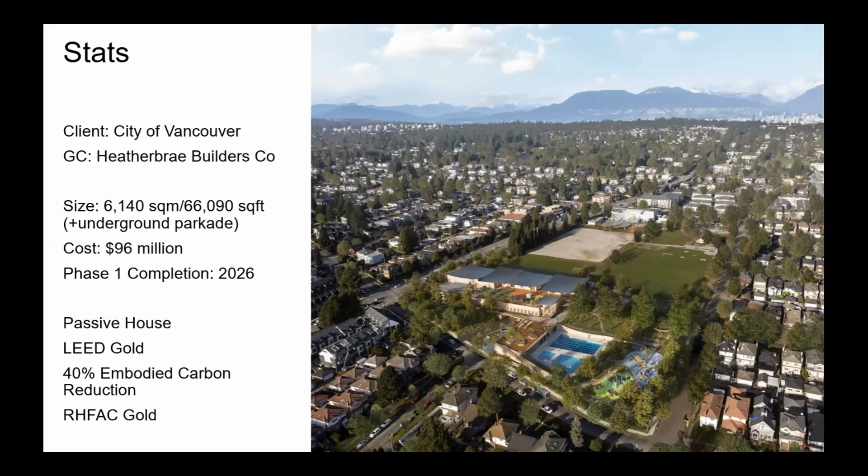A lot of ambitious targets for this project: Passive House certification, LEED Gold certification, a 40% embodied carbon reduction, as well as the Rick Hansen Foundation's accessibility certification goal. So in order to bring all of these targets together, we came up with a project vision. Go to the next slide.

So our vision for this project is to make the Marpole Community Centre the most inclusive, forward-thinking, and high-performing facility the City of Vancouver has ever had. This is the first community center for the City of Vancouver since the Trout Lake Community Center in 2012. There are a lot of eyes on this project. A lot of departments were involved, a lot of ambitions to really cement the City of Vancouver as a leader in this space. Next slide.

So working back from that vision, I'm just going to break it down into our values and principles and goals that all feed into that vision. So next slide. So we have our vision in the center, and that is fed by our values, which are universal, as well as our principles and goals, which are project specific. So starting from that vision, we go to the next slide. Again, that very, very ambitious vision. We then break it down into our values.

So next slide. So in order to do that, we had a series of workshops with representatives from the City of Vancouver, from our consultant group, from the Vancouver Park Board, across all sorts of departments to understand what was important to everyone involved in the project so that we could embed that into the project charter. So if you go to the next slide, together we came up with 13 values for this project, loosely organized in 3 themes. So you'll also notice that some of these values work with more than one theme.

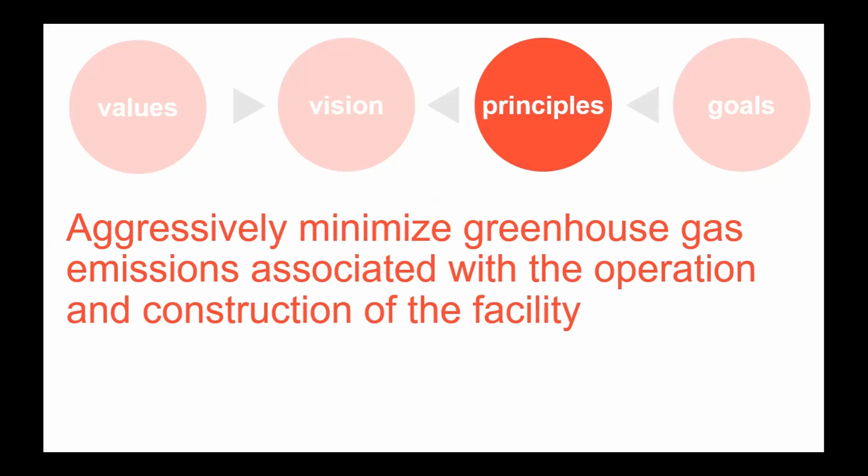So next slide. Our principle for this value is to aggressively minimize greenhouse gas emissions associated with the operation and construction of the facility. So now that we know what we want to do, we have to break it down into goals to figure out how to get there. Go to the next slide. These are our 4 goals associated with this value.

So number 1 is to eliminate the use of fossil fuels. We did this by designing an all-electric building, so there is no natural gas connection to this community center. That includes the pool as well, and even the backup power supply. So number 2 is to generate renewable energy on site. There are photovoltaics on the roof of the building, which feed into a backup battery, which provides our emergency power supply. So there's no diesel, there's no fossil fuels on this building so that we can help meet our operational carbon goals.

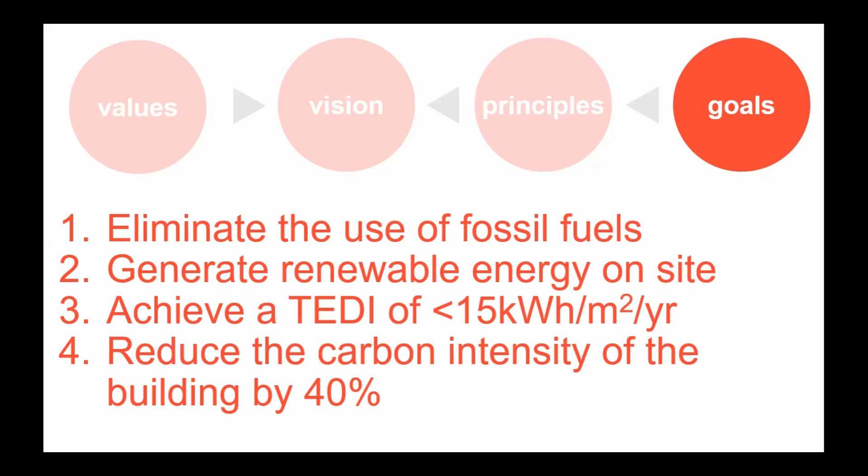The third target is the Passive House target. So achieving a TEDI of less than 15 kilowatt hours per square meter per year, and this is addressing operational carbon. And number 4 is to reduce the embodied carbon intensity of the building by 40%, which is something that Forrest is going to go into more details on. Next slide.

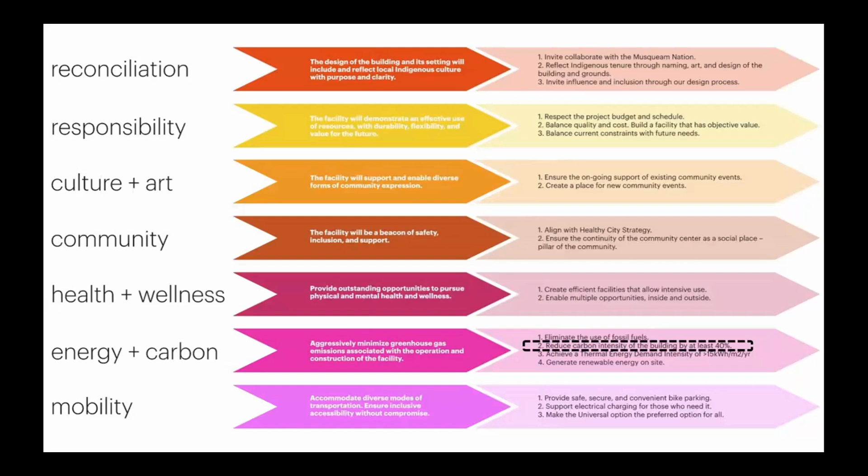I wanted to talk to you about all of our goals because it was important for me to explain that this target of a 40% embodied carbon reduction exists in an ecosystem of many, many goals and many targets. So if you click next, you'll see it circled in black. And the importance of that is when we're making decisions on embodied carbon, we have to make sure we're not undermining the rest of our goals and the rest of our targets in this project.

So if you go to the next slide, again, just a continuation of all of the values and principles and goals for this project. So next slide. Sometimes all of these goals work together, and that's great. That's ideal. An example would be our parking reductions. So we explored parking reductions on this project because of our responsibility value. So one of the goals is to respect the project budget and schedule.

We were given the mandate that no park space should be given over to surface parking on this project. That meant that all parking had to be provided in an underground parkade. The bylaw requirements for parking for a building of this size would have amounted to about 250 parking stalls, which when all laid out was about 7,000 square meters of parking, which is more area for parking than for community programming. And because it's an underground parkade, it's very cost prohibitive.

And so in order to meet that goal of respecting the project budget and schedule, we looked to aggressively reducing our parking counts. We did this by working with a transportation consultant to help us implement transportation demand management measures to reduce the parking count. And those TDM strategies also worked or had overlap with our other goals.

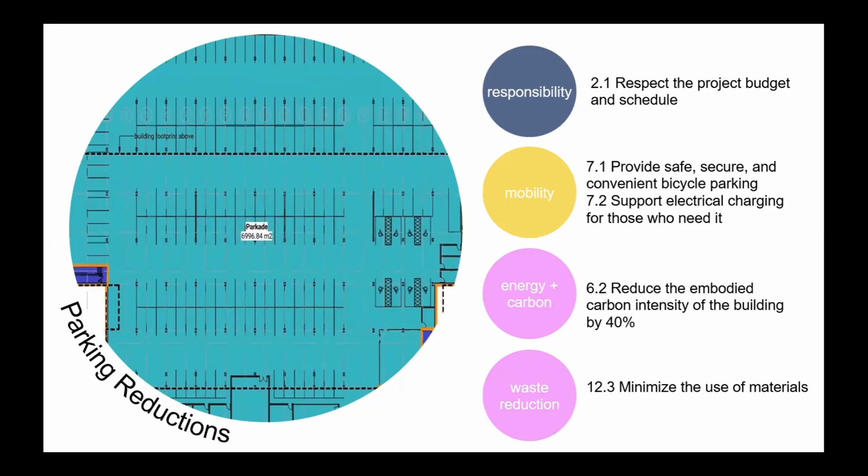Another example of these goals working together is the decision to use a mass timber construction for the structural system. So this met our goal under biophilia to prioritize the use of natural materials, as well as reducing the embodied carbon in the building by using timber instead of concrete and steel. However, sometimes there is some contradiction in the goals.

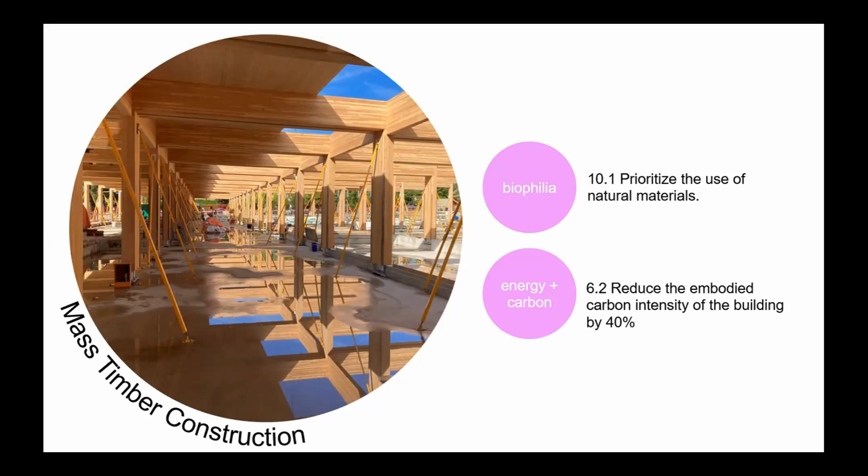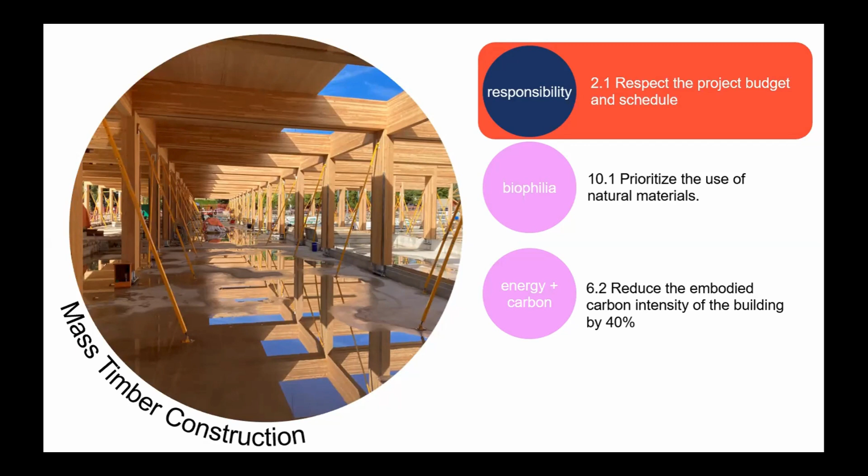So if you click next, there is a premium for mass timber construction, and because of supply chain pressures in our industry right now, there are potential impacts to schedule. So we needed to find ways to use a mass timber system while still respecting the project budget and schedule. And how we did this is to work with a construction manager who allowed us to tender the structural system early so that we could work with a mass timber supplier in BC, and when we needed to revise our design so that it could meet the project budget and schedule. Next slide.

So continuing with that theme of goals that are seemingly at odds is the discussion between balancing operational and embodied carbon goals. Next slide. So this is the discussion between passive house and embodied carbon. So one of our goals, or one of our targets, is to achieve passive house certification. So that TEDI of less than 15 kilowatt hours per square meter per year.

And in order to reduce operational carbon, one of the best ways to do that is to improve your building envelope so that less energy is needed to heat and cool the space. But the trade-off on that is that by increasing your building envelope, you're increasing the amount of materials needed for the building and therefore increasing your embodied carbon.

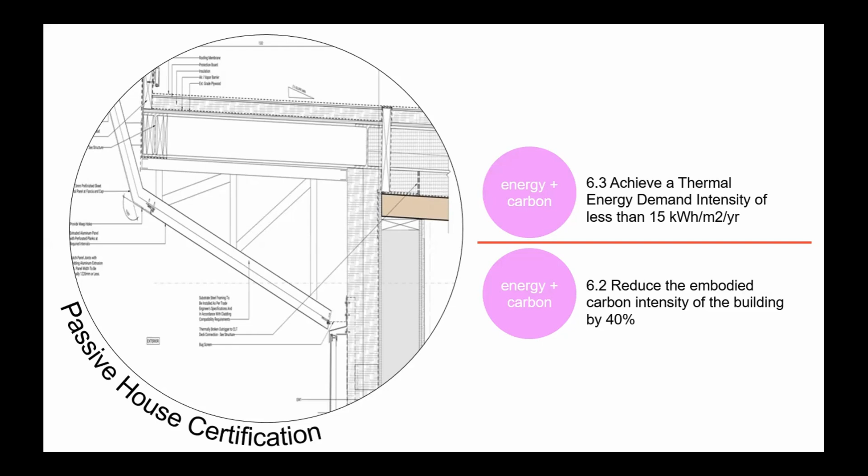So next slide. Before I go too far, I just wanted to give a little passive house primer in terms of the actual targets for passive house. So passive house basics is that a passive house building has to meet two targets: a TEDI of less than 15 kilowatt hours per square meter per year, and an airtightness testing of 0.6 air changes per hour. So it's a low energy building that's very airtight.

And if you go to the next slide, Passive House Institute has released Passive House principles that will help designers achieve that. And for some of these, there are carbon implications, including thermal insulation. So the wall assembly of the Marpole Community Centre is about 8 inches of insulation. So that's a lot of material and a lot of embodied carbon.

Another one is passive house windows. So we have triple glazed windows. So again, a lot of material, a lot more embodied carbon. Also air tightness, so different membranes, and thermal bridge reduced design, so specialized components to create thermal breaks.

So all of these impact your embodied carbon in the building, and need to be taken into consideration so that you're not prioritizing operational over embodied carbon reductions. But another way to improve your passive house modeling, and probably the #1 piece of advice the passive house designer or consultant will give you, is to improve your form factor.

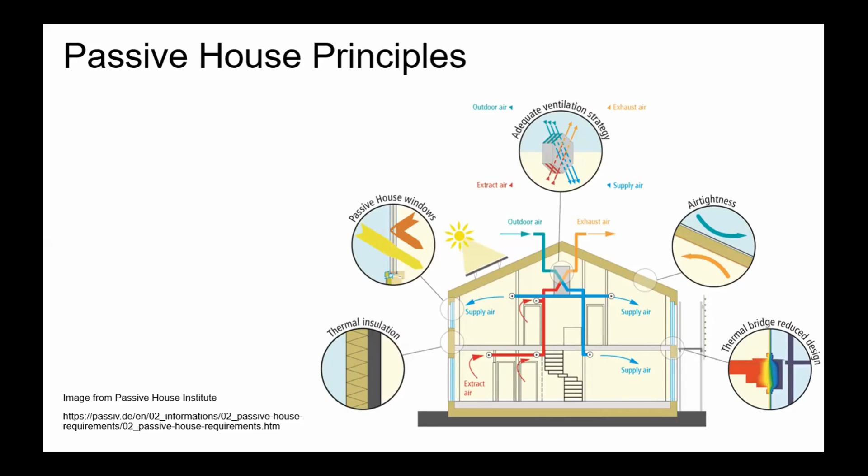And what that means is to reduce the amount of building enclosure needed to enclose the building or the volume. How that helps you from a passive house perspective is there's less surface area for thermal heat gains and losses. And how that helps you from an embodied carbon perspective is that if there's less area of building enclosure, there's less embodied carbon. So knowing that, we use that strategy to influence our building planning. Next slide. I'm going to walk you through the building planning, just to illustrate this.

So the first thing we did was to decouple the pool function from the community center. Because the community center is the passive house building, and the pool is a seasonal program, and the spaces associated with the pool are indoor-outdoor spaces. And that's not great for passive house and for air tightness. So if we just remove it from the passive house enclosure, we're improving our passive modeling.

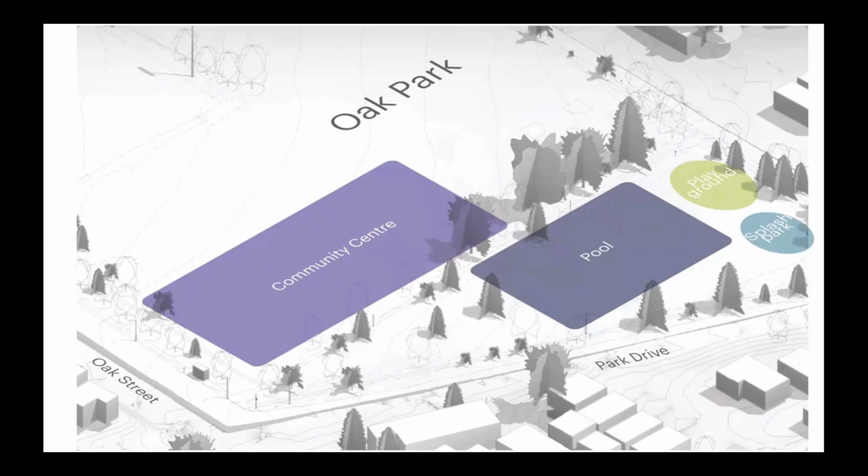Next. So then we can focus on the community center itself. When we're looking at organizing the spaces, we're breaking it up into the different components and what they need in terms of heating and cooling. So we start with the gymnasium. It's a large volume; we're just putting it tight against Oak Street to help buffer the rest of the building and the building programs from that loud arterial road. Next slide.

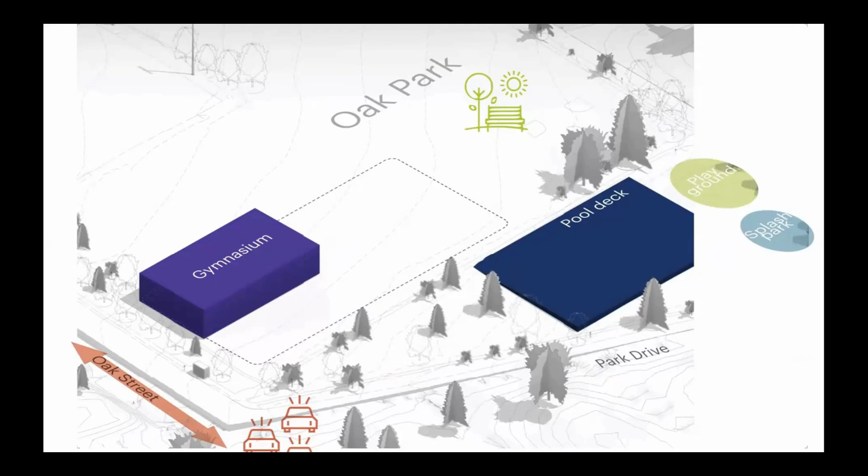Next, we locate the fitness and recreation programs, which are programs where people are generating a lot of heat. They're working out, they're doing cardio, it's getting hot and sweaty in there. And so by locating them on the north aspect of the building, we can benefit from passive cooling. The multipurpose rooms are located along the south bar because these are more passive areas. People are attending lectures, going to luncheons, or it's after school care. So these are spaces that really benefit from those solar heat gains and that southern exposure.

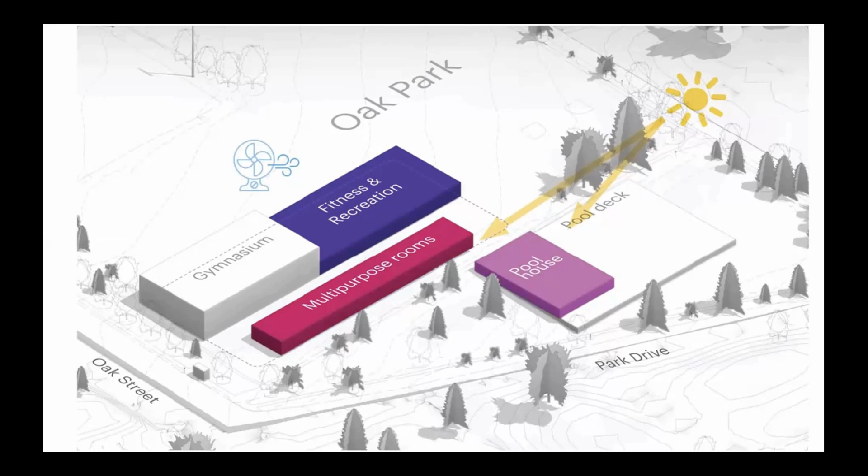Next slide. Next, we introduced a circulation spine, which we've called the Great Hall. It's an east-west axis that connects views to the park on either side. And the other move that we did here is we've removed the vertical circulation from the passive house enclosure. That's that yellow tower in the bottom right-hand corner of the building. And we did that to reduce thermal bridging.

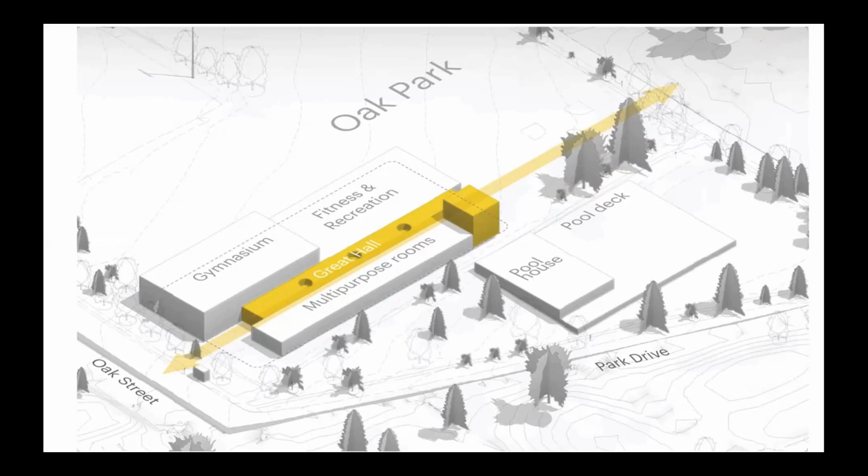So elevators are not airtight, and the elevator is connected to the parkade. So if we can reduce the amount of unconditioned parkade air just opening right into the building, we can improve the passive house modeling as well.

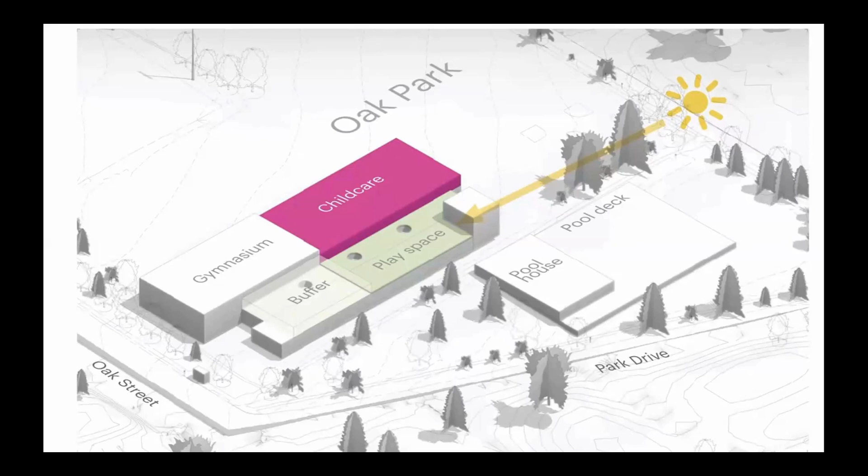So next slide. And the final program component is the childcare, which is located on level 2. Again, nestled behind the gymnasium so that it's protected from Oak Street. And opening up that play space on the south side of the building so that it's benefiting from that southern exposure. It's also protected by the solar panels. So where it says buffer, that's where our solar panel array is. And again, it's just to protect those child spaces from Oak Street and those busier areas. Next slide.

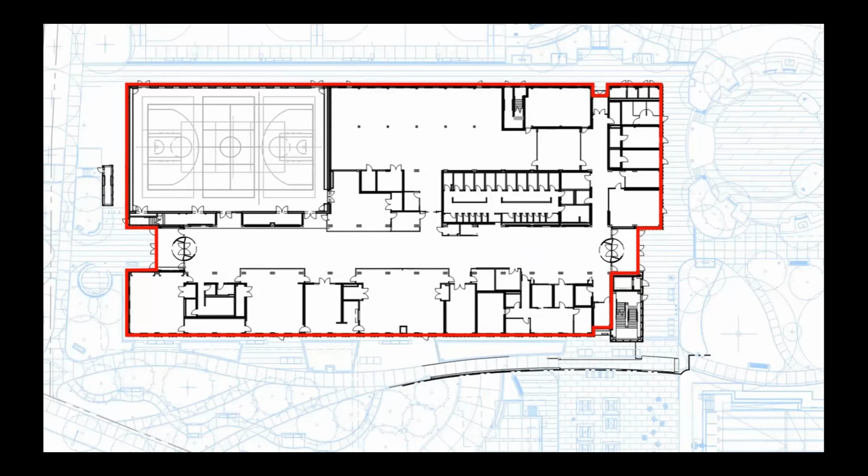And then on level 2, next slide, is the childcare. And again, you can see very simple massing, reducing the articulation as much as possible to create a very effective form factor. Next slide.

And just to end on a pretty picture so that you could see how it all comes together. So by incorporating these Passive House principles and this logic in terms of form factor into the planning of the building, we can meet our sustainability goals when it comes to embodied carbon as well as operational carbon. So it's not a trade-off.

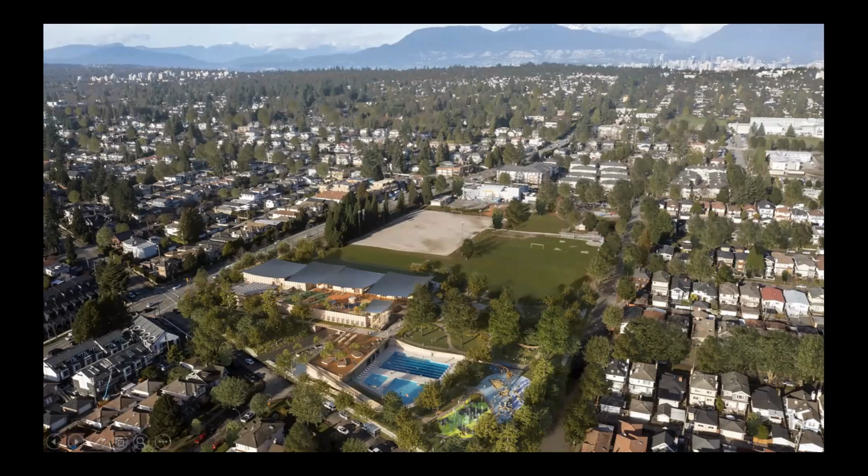And I will pass it over to Forrest now.

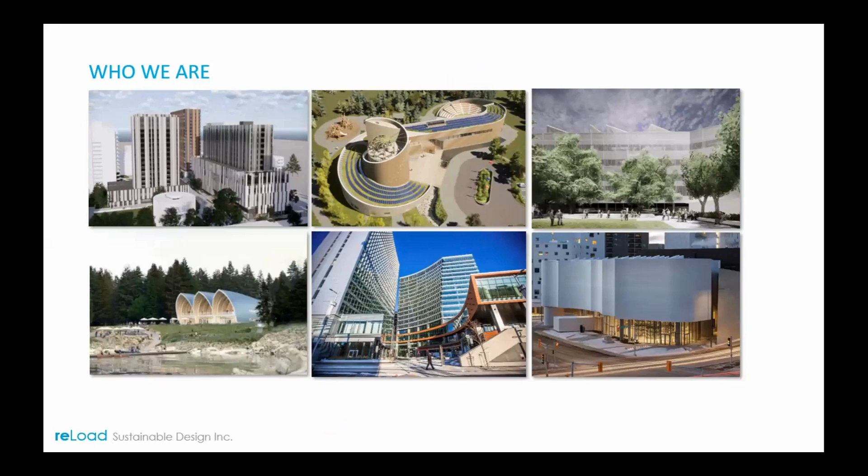To dig into the outline that I'll be sharing with you, we have the project context and goal overview, then the baseline for this project and how it evolved in relationship to the City of Vancouver Embodied Carbon Guidelines. And then I'll talk about the low carbon design strategies. I'll mention that these strategies are also featured on the CLFBC website, so you can take a look there, and I'll try to share some details that are additive to that conversation as well.

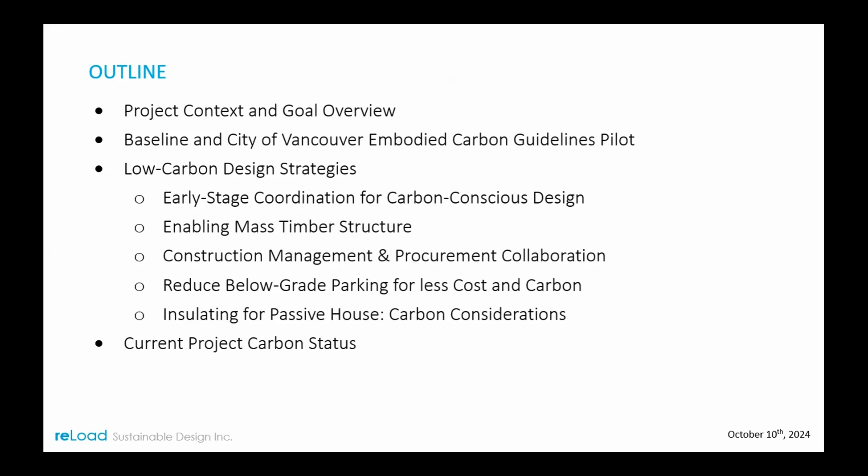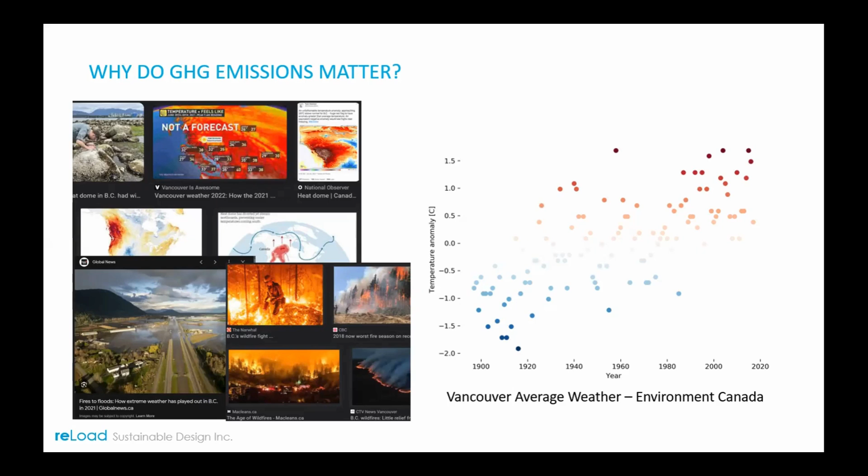But to talk about where this 40% reduction target came from, we have to look at the City of Vancouver Climate Action Plan. So here you can see that they're targeting a 40% reduction compared to 2018. So that's where this project target came from. And that's because we are in a climate crisis right now where we're seeing flooding, increased wildfires, and heat domes with an ever-increasing average temperature in Vancouver. So the city recognized that and identified embodied carbon emissions reductions as one of the key strategies to address this crisis. This project took that 40% reduction goal, and at the very beginning, we set some performance-based targets.

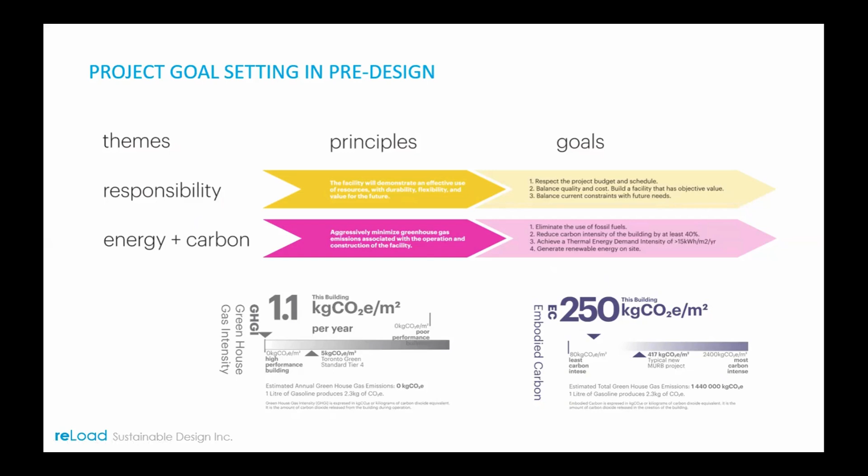So we understand that we have to be 40% less, but 40% below what? And what is that baseline? So we looked at benchmarking first, and we know that there is available benchmarking information for MURBs, but not that many databases that have community centers out there. So we started with this 250. Let's see if we can hit that in the preliminary design stage. Remember that number, I'll come back to that later on. We also had this GHGI goal of 1.1 kilogram CO2 per square meter. That relates to the Passive House project as well.

So talking about the baseline embodied carbon for this project, we had this OPR 40% reduction based on a 2018 baseline. So what is that baseline? We had to have a lot of conversations with the City of Vancouver and Diamond Schmitt to establish a building that would have been constructed in 2018 to generate a notional baseline. And at that time, there was little guidance out there for how to approach this problem. In 2021, the first draft of the then called LCA modeling guidelines was released. And we used that draft in our first whole building LCA to provide feedback to the City of Vancouver on implementation, whether it was forming a good baseline, whether we could game it. We tried to break it and gave feedback on how it could be fixed.

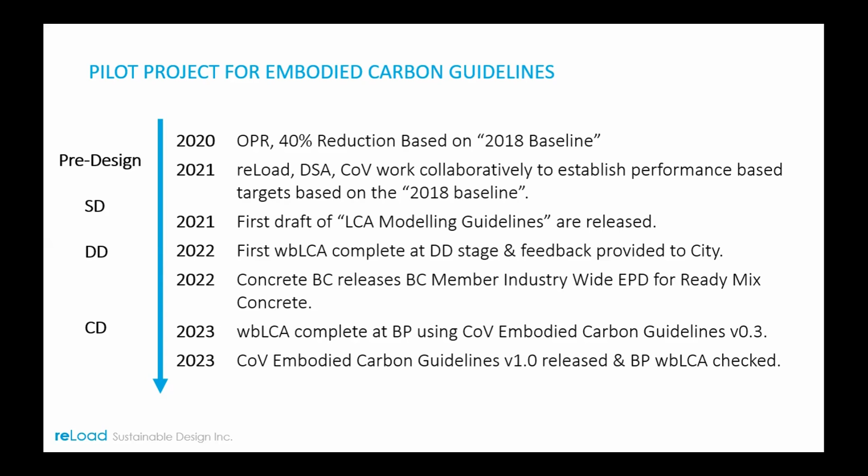And then the baseline changed again when Concrete BC released their member-wide EPD that focused on British Columbia concrete versus Canadian industry-wide. So our baseline changed there because we know that Concrete BC is relatively lower embodied carbon than Canadian concrete. And then for our building permit, a key milestone for achieving this 40% target, we used the embodied carbon guidelines version 0.3, which are much improved from the LCA modeling guidelines initially, including the name. And we now have version 1 that was released a little bit later. So we checked the BP whole building LCA against what we had done previously, and those are the results that we're seeing on screen today.

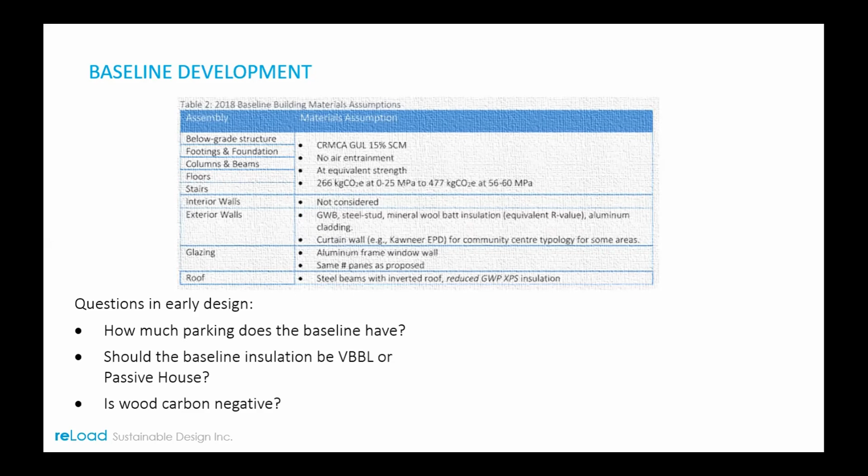When we were developing this baseline, we had these questions like, how much parking does the baseline have? Or should the baseline insulation be VBBL or Passive House? Are we penalizing our project for having additional insulation? And as well, is wood carbon negative? Are we counting the biogenic carbon for this project? So the COV embodied carbon guidelines answer each of these questions now.

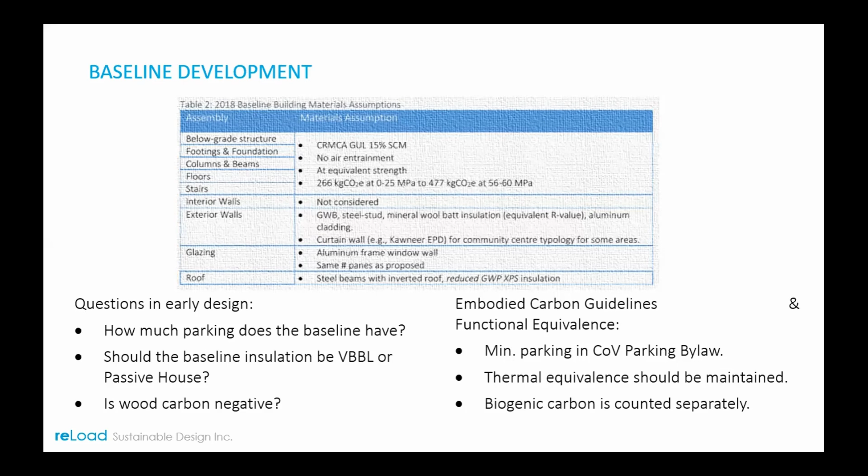So they state that the baseline can have the minimum parking in the City of Vancouver parking bylaws, or what used to be in those minimum parking requirements. That the thermal equivalence should be maintained. So there should be the same number of panes of glass, the same thermal equivalence for the envelope, and that's referencing the clear-field values for the energy modeling folk out there. And as well that biogenic carbon is counted separately. So the baseline that we developed was a steel superstructure and a concrete substructure for this project.

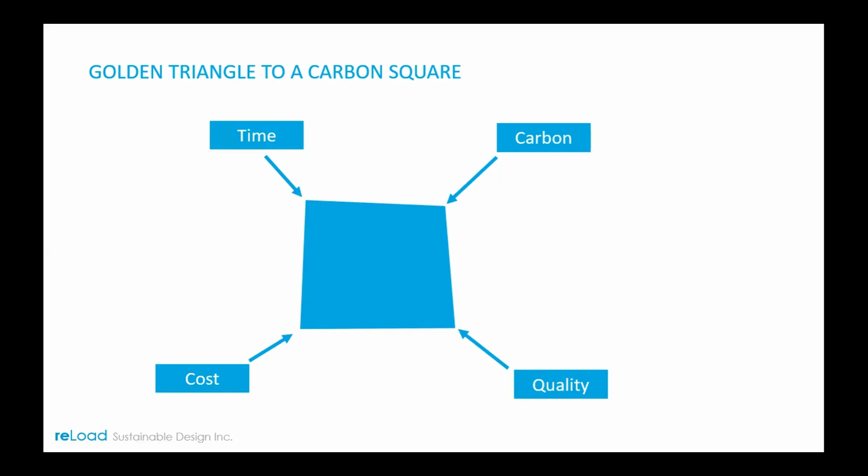I'll now talk about the design. And for this project, we not only had time, cost, and quality, we were also constrained by carbon. And so Diamond Schmitt was really great at involving us in the design where it mattered and providing a carbon context to each major decision that was made.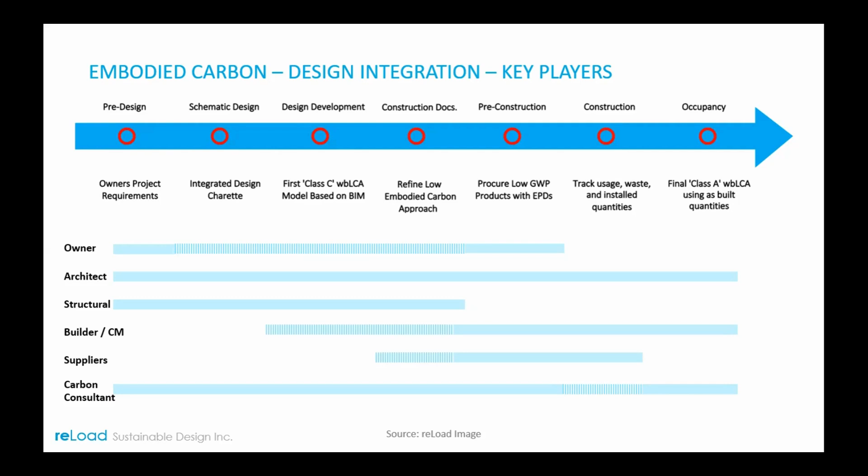Here's a quick figure on how embodied carbon can integrate into the design process. And the two key points that I want to focus on in this presentation are in the pre-design and in the pre-construction phases. So we'll get into that a little bit more, but these are kind of the main players that we'd like to see in this process.

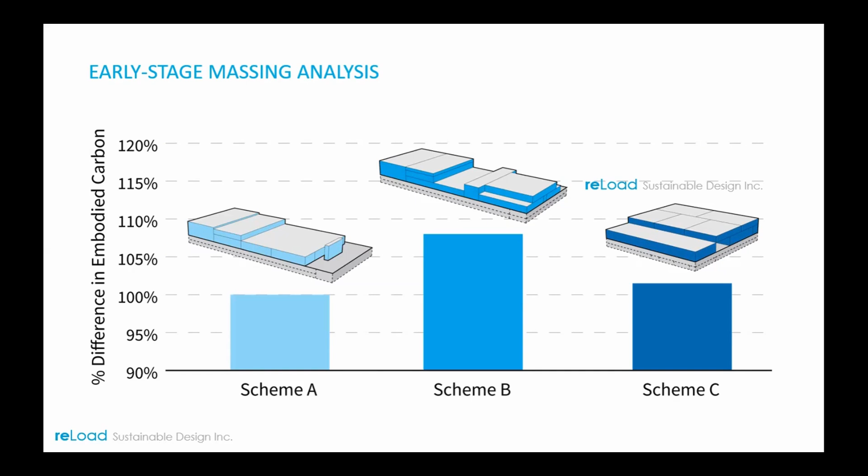In this pre-design stage, as Carolyn mentioned, we have massing analysis. So we assigned carbon intensities to the different building elements and looked at their relative embodied carbon. And what we found from that is staying away from Scheme B was a good idea. I'll mention that the baseline for Scheme B was never developed, that the baseline for Scheme A was gone with. So from that perspective, this project is achieving more embodied carbon reduction than we would have had we gone with a different building structure.

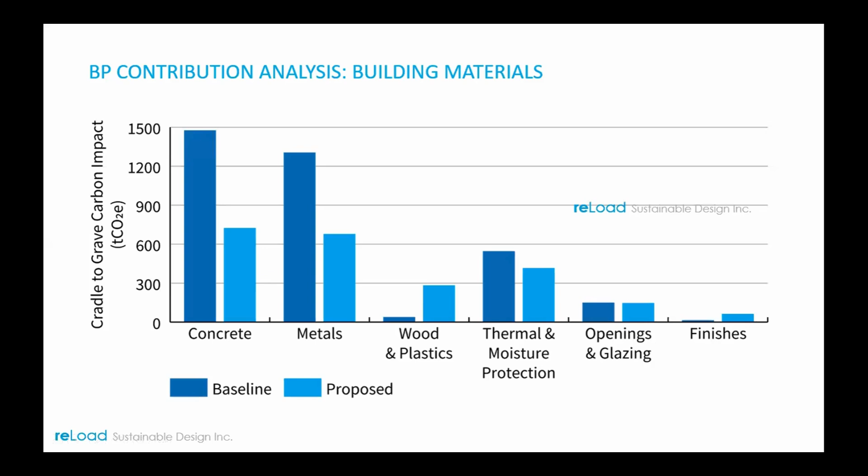A key way that we interrogated the design and used the analysis to inform the design was through contribution analyses. So I'll show two different ways that we look at this. One is by material type. You can see that the baseline had a significant amount of concrete and metal, as well as thermal and moisture protection. And the proposed was mainly concrete, metals, much more wood because we have a mass timber structure, and slightly less thermal embodied carbon emissions from those materials. And I'll dig into why those emissions came like that in the following slides as well.

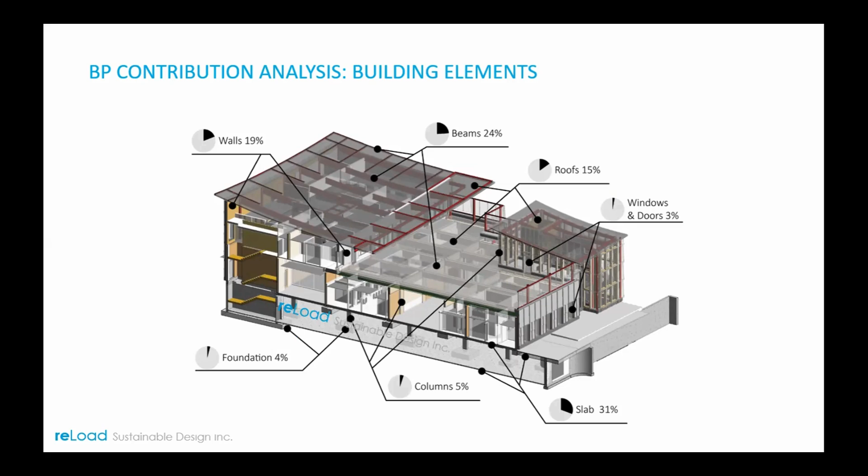Getting into the later stage of the analysis and the project that I was talking about with these submittals, I'm going to go through this in a little detail because I think this is one of the key pieces for this project, is that for each key contributing material that we identified, we're asking for a base bid, which is a business as usual, and also a lower carbon bid. So two bids, we want to see the price for those two, and then the team can choose between that.

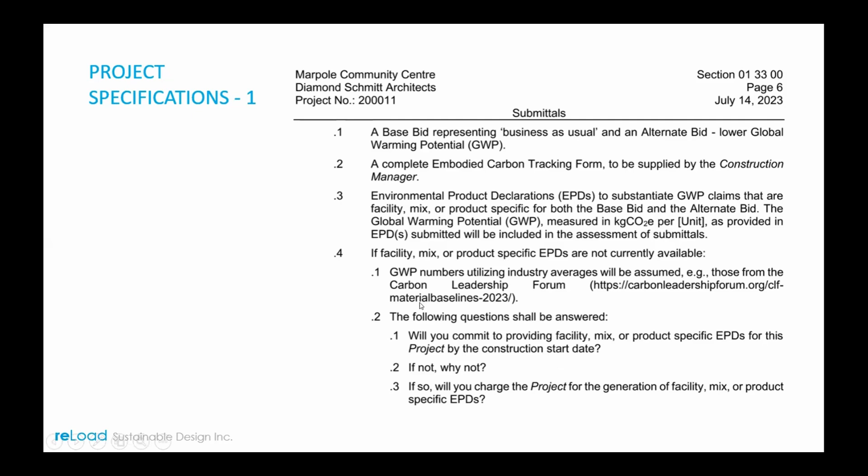We also want to see a completed embodied carbon tracking form with these different bids, and I'll show that on the next slide. These have to be backed up by EPDs. If you don't have an EPD, then we'll use an industry average and ask you to answer these questions, which nobody did. So next time we're not going to include these questions because that was too much to ask.

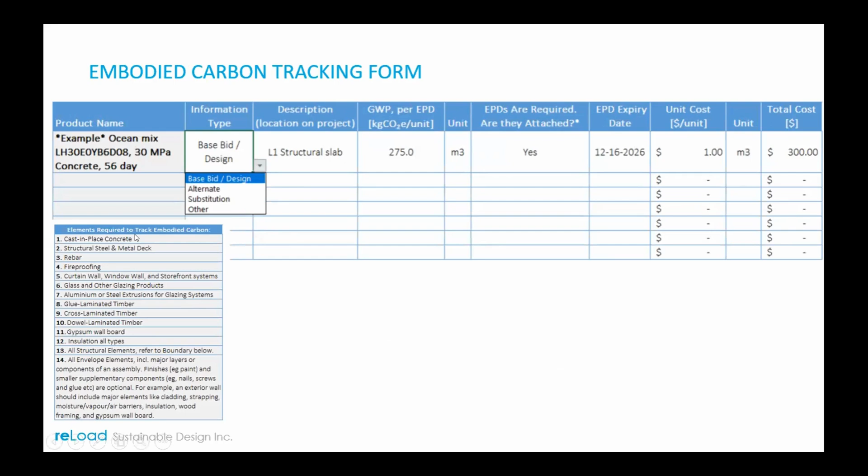Here's an example of the embodied carbon tracking form. And so we asked for whether it was a base bid or an alternate bid, the amount of concrete, and what the unit costs for those different materials were, as well the global warming potential is listed. And in this way, we can compare cost and embodied carbon to identify any easy wins. And you'll see here the list of different elements that we are requesting to be tracked.

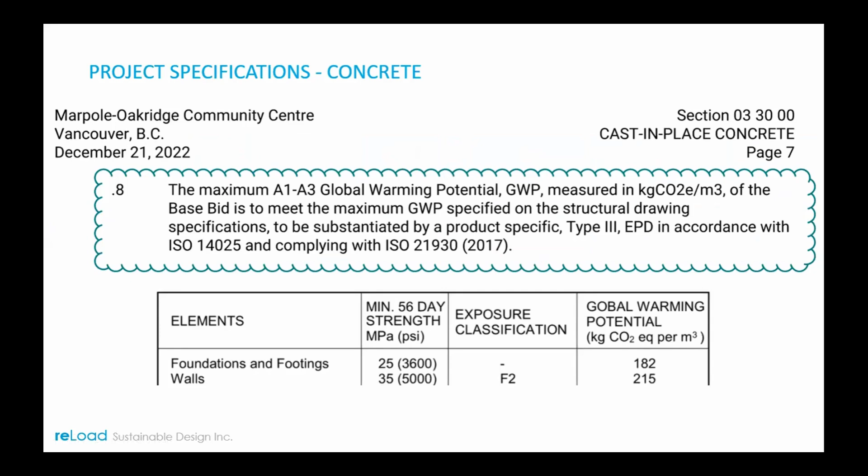Focusing more on concrete, for the base bid on this one, we actually had the base bid be a maximum global warming potential that was listed in the structural drawing. So we came up with this global warming potential table that you'll see on the bottom here. And for example, foundations. Yeah, I'm good, thank you. Foundations have 182 kilograms CO2 per cubic meter. And then the alternate bid would be lower than those targets.

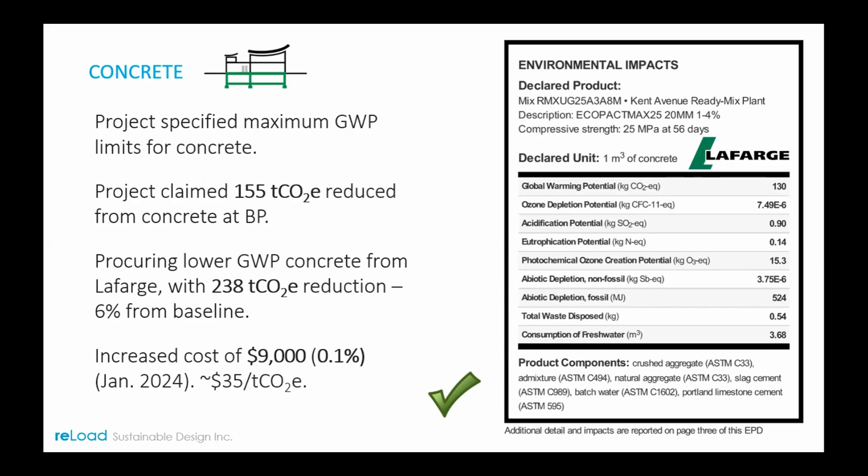And this is how it turned out for concrete. That was a good story here where we have a lower carbon bid that came in that was only $9,000 more expensive, or 0.1% on the concrete budget. So an example of that is what's shown on the right, where, like I said before, we had 182 as our maximum, and when the bid came in, it was at 130. So we were able to claim additional savings after the building permit by this procurement method.

There's a fair bit to get into here on the mass timber approach, and I'll gloss over this a bit, and we can talk a bit more about it in detail in the questions if there's time. But one of the key pieces in that initial design stage was setting a project on a rigid grid so that we're minimizing transfer slabs, aligning the columns from space to space, and thereby improving the structural efficiency of the project. So that helped a lot to enable mass timber.

The other thing that helped to enable mass timber was the fire code approach, which didn't allow for a building of this size to be constructed with a combustible structure. So the gymnasium portion of this project was actually separated out and assigned different exiting strategies and fire ratings between the gym and the rest of the building.

A lesson learned from this mass timber approach that Carolyn touched on is that the suppliers for this product, Kalesnikoff in this case, were engaged very early in a design assist method. So if there's a product that you're wanting to identify early on, it makes sense to engage with them really early. And this was done very early on when we thought that biogenic carbon could be counted as a negative number.

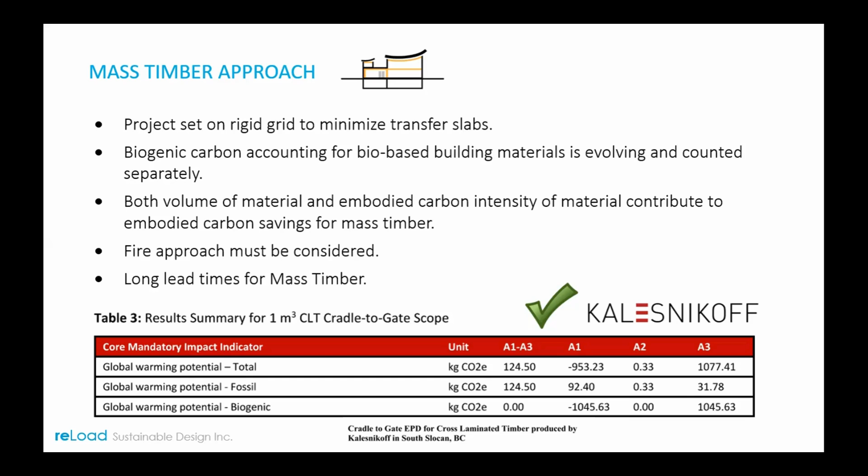You can see in the table below, we have this global warming potential biogenic, which has this negative carbon flow at the beginning. So it was thought at the beginning of this project, before the release of the embodied carbon guidelines, that would count negative, and that was our sure shot to meeting the 40% reduction target. And as the methodology has evolved, we've come up with better practices, or conservative practices at least, that are accounting for only that fossil line of biogenic and counting the biogenic carbon separately.

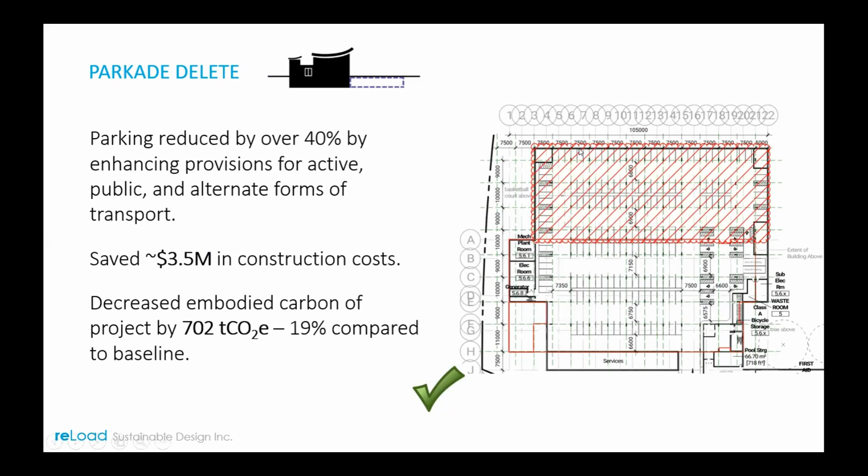So as Carolyn mentioned, we were able to reduce a significant portion of the parkade. And that accounted for almost half of the embodied carbon emissions that were reduced for this project. Saved the project a lot of money, approximately $3.5 million, and really shows the value of build less stuff, cost less, is less emissions. Very simple. So if your projects can minimize below grade parking, that was a key win for us, and a strategy that we're taking into our other projects as well.

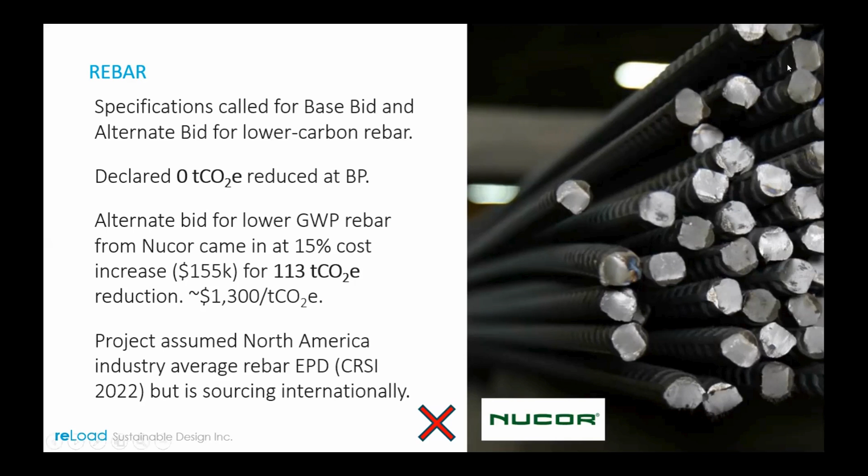We looked at rebar, and in the end, it didn't make sense. When we got the lower carbon alternative bid, it was a 15% cost premium and a high dollar per ton CO2 reduced. So we didn't go for this one. We've started to receive shop drawings for the rebar and are noticing that it's being sourced internationally, which is interesting when you think about assuming a project industry average EPD that was for North American rebar. So that's a question we have as we go into the as-built whole building LCA, is what those impacts might be.

For the insulation, there were few alternatives for the walls that were found. I noticed you had a question about possibly using biogenic carbon materials. We did look at that, possibly using Gutex, and in the end, due to resiliency concerns, mineral wool was the product of choice. And so there's the same amount of mineral wool insulation in the proposed and the baseline.

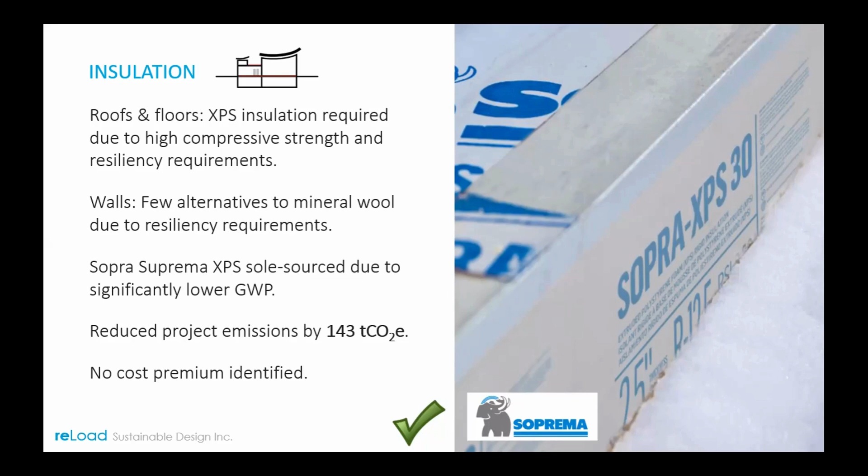For the roof and floor, they required XPS insulation due to the high compressive strengths and resiliency requirements. So we sole sourced Soprema XPS insulation because it has much lower global warming potential, especially because of the blowing agents that are used. That came back from procurement, and no significant cost premiums were identified.

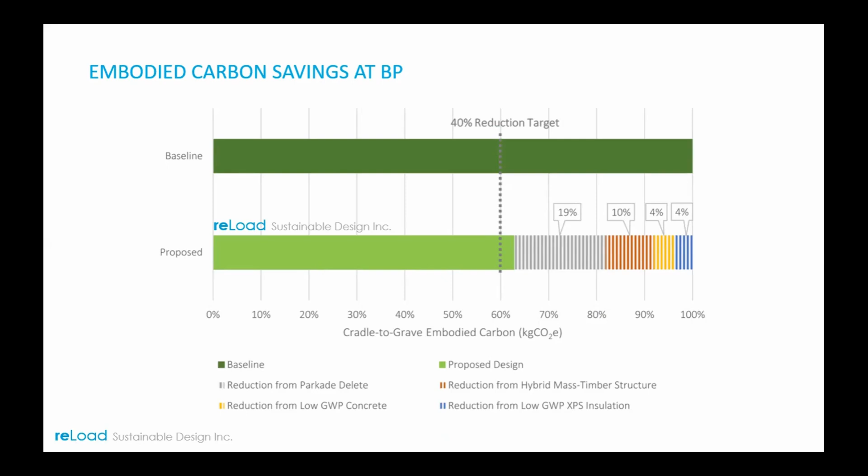So let's take a look at how the embodied carbon results changed throughout the project. At the building permit stage, we actually weren't meeting this 40% target. We'd shown pathways to achieve it by this alternate bid strategy, which we ultimately did achieve. So you can see that 19% is from the parkade, and then we have 10% from the hybrid mass timber structure, 4% each for the lower carbon concrete and XPS insulation.

What we actually procured to date is much lower embodied carbon concrete than what we had assumed at the BP. So that's what gets us to our 40% target and shows the procurement stage again being key.

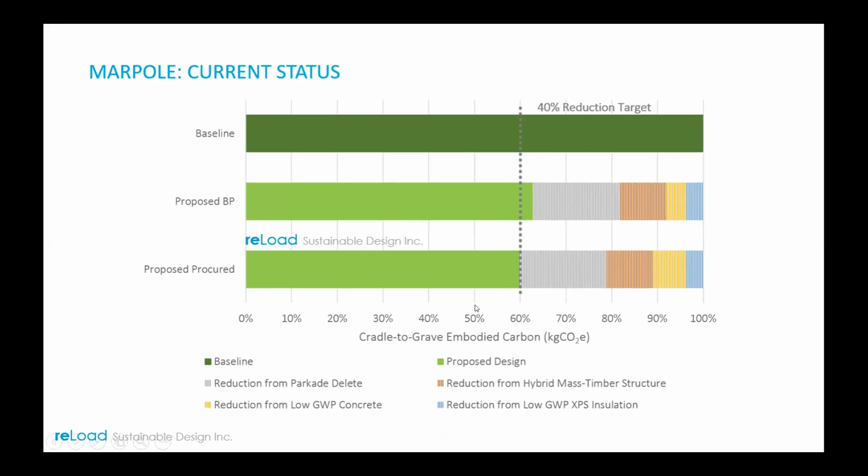So remember that 250 value that we set at the beginning of the project? Well, we ended up exceeding that. Turns out that community centers are more carbon intensive per square meter than your typical MURB. But we can also see that the baseline here is quite high, at over 600 kilograms CO2e per square meter.

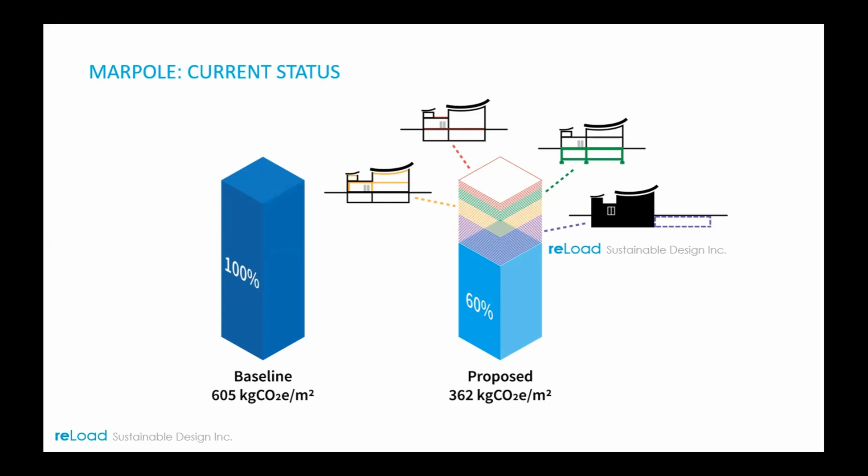So we know that we had achieved significant embodied carbon reductions for this project, both on a % reduction basis and on an absolute basis, just looking at these hard and true ways that we addressed the design of the project and evolved the design.

Looking at the cumulative emissions from the project, it's clear that the upfront carbon emissions are the key factor here. This is primarily because the operation of the building is all electric and passive house. So this is cumulative emissions, mind you. So over the 60-year lifespan, we have a small amount of emissions from the operation of this building.

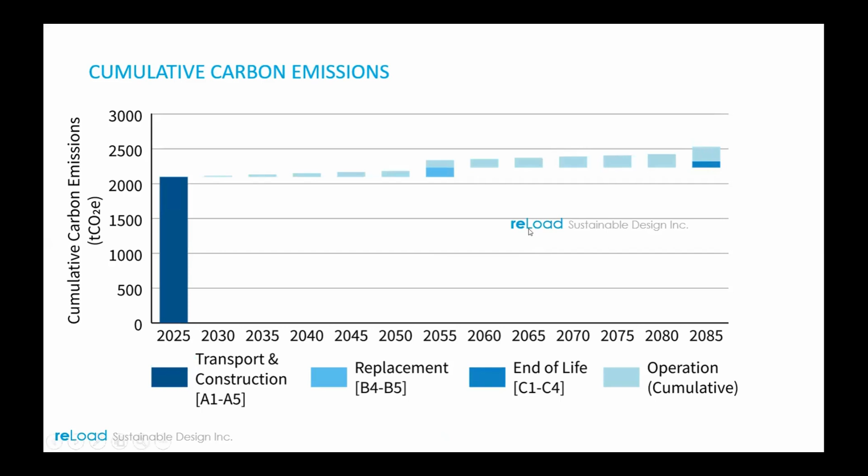And it's more so having to do with the construction, transportation, and the materials, the way that the materials are made in this A1 to A5. We have some allowance for replacing of materials as well in the B stage.